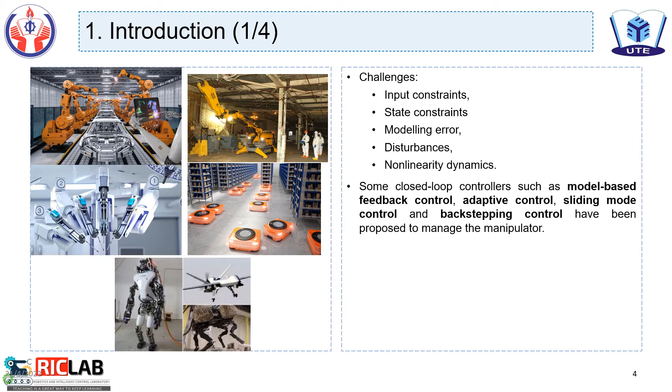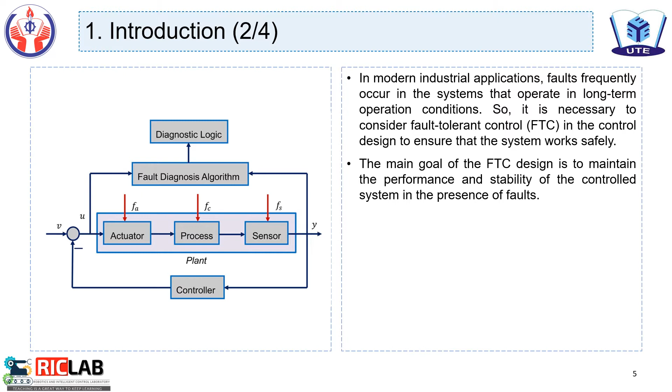In modern industrial applications, faults frequently occur in systems that operate under long-term operation conditions. So it's necessary to consider fault-tolerant control in the control design to ensure the system works safely. The main goal of fault-tolerant control design is to maintain the performance and stability of the control system in the presence of faults.

Fault-tolerant controls can be classified into passive and active fault-tolerant control. For passive fault-tolerant control, the approach is developed based on the robustness of the conventional control without any feedback of the normal and fault operation. In contrast, active fault-tolerant control depends on the online results of a fault diagnosis observer to make decisions for reconfiguring the control structure.

Although the active fault-tolerant control possesses a complex structure, it can manage the high magnitude fault well.

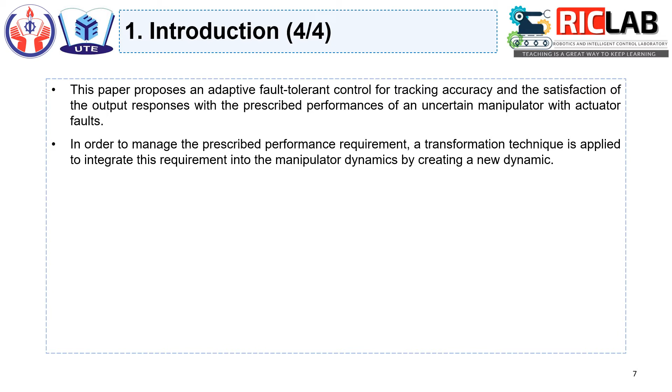This paper proposes an adaptive fault-tolerant control for tracking accuracy and satisfaction of the output response with prescribed performance of an uncertain manipulator with actuator fault. In order to manage the prescribed performance requirement, a transformation technique is applied to integrate this requirement into the manipulator dynamics by creating a new dynamic.

Then the proposed control is designed based on the new model with backstepping techniques, a state observer, and a fuzzy logic system. The state observer has to approximate the unknown uncertainty, including the external disturbance and actuator fault. In practice, the approximation error of the state observer in the transient state is significant.

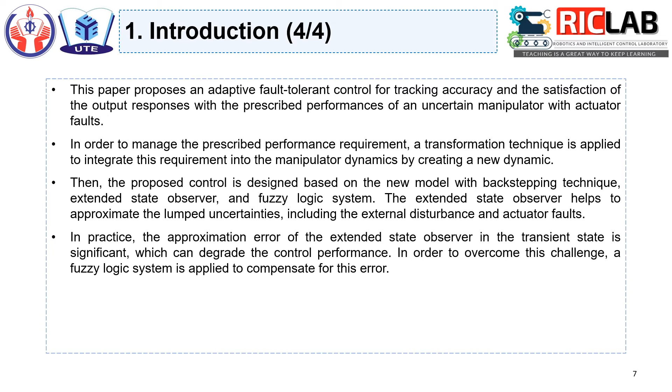It can destroy the control performance. In order to overcome this challenge, the fuzzy logic system is applied to compensate the error. Finally, simulations of a two-DOF manipulator are implemented in MATLAB Simulink to prove the effectiveness of the proposed control.

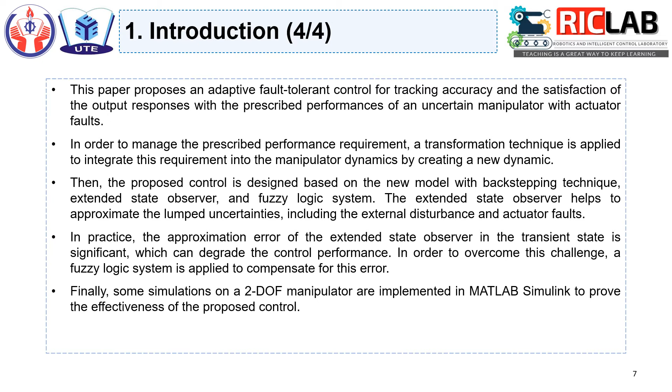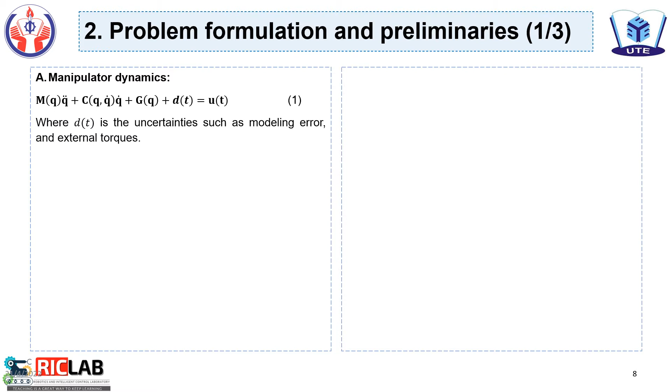Now we move to section 2. In section 2, we present the manipulator dynamic by equation 1, where dt is the uncertainty including the modeling error and external disturbance. The actuator fault is presented by equation 2, including bias error and loss of effectiveness.

In order to integrate the actuator fault in the control design, the manipulator dynamic in equation 1 is represented by equation 3. So we have delta dt including the uncertainties and the bias error and loss of effectiveness errors in the actuator fault.

We have three assumptions for our manipulator. Assumption 1: the manipulator is constructed such that for any actuator failed at the locked-in phase, the remaining active proportion of the others is available, so the manipulator is still controllable.

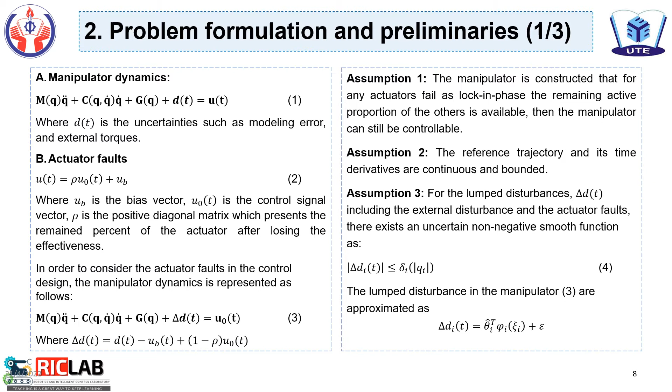About the state observer, the state observer is used to estimate the unknown uncertainty, and an extra state is provided to exhibit the unknown uncertainty. In order to design this observer, we have to present the manipulator dynamic in the state-space model as presented in equation 6. We have assumption 4 for our manipulator.

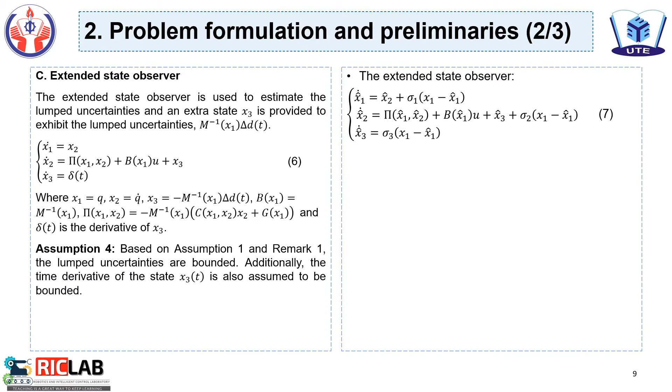The first part is based on assumption 1 and remark 1: the lumped uncertainties are bounded. Additionally, the time derivative of the state is also assumed to be bounded. So the state observer is presented by equation 7.

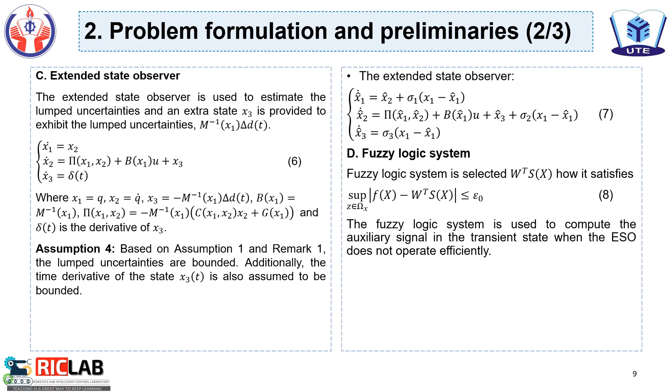The prescribed performance approach can be explained as follows: the control applied to the manipulator guarantees that the output response tracks the reference and stays within the upper boundary and lower boundary. The prescribed performance is described by conditions 10 and 11.

So we define the new error variable to integrate the prescribed performance into our dynamic, and the unconstrained dynamic of the manipulator is presented by equation 14.

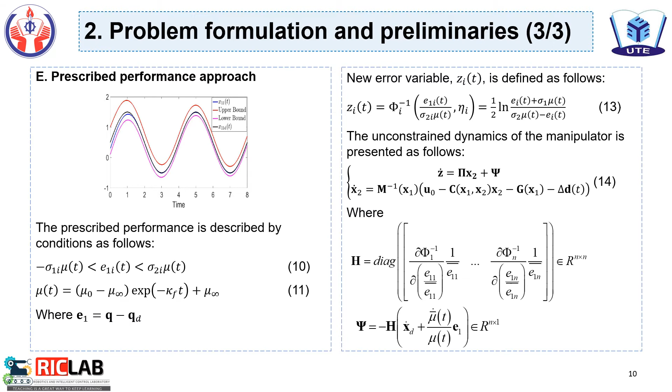Now we move to section 3, proposed controller. The proposed controller is developed based on backstepping control, extended state observer, fuzzy logic system, and adaptive law.

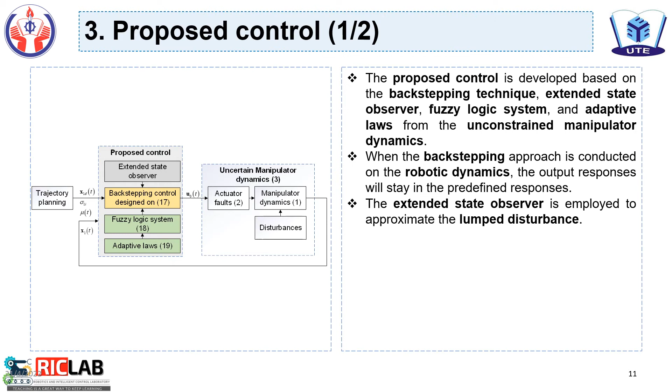For the unconstrained manipulator dynamic, when the backstepping approach is conducted on the robotic dynamics, the output response will stay in the predefined response.

The extended state observer is employed to approximate the disturbance, including the uncertainty and actuator fault. The adaptive fuzzy logic system compensates the approximation error of the extended state observer in the transition state. The effectiveness of the extended state observer and adaptive fuzzy logic system ensures the reliability and quality of the control system.

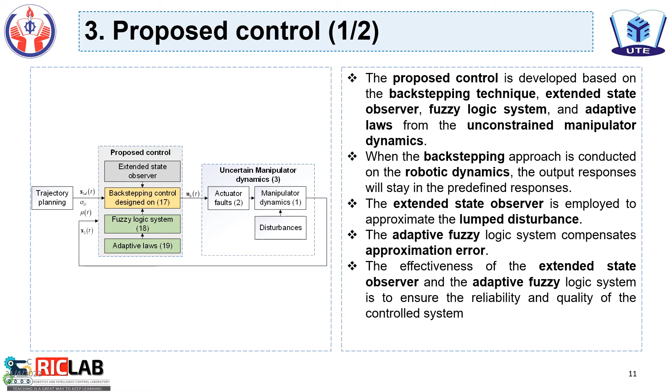The proposed controller is conducted as follows. First, we define the tracking error as equation 17, and next we select the virtual control as equation 18, and the controller is selected by equation 19. In the controller we can see the result of the extended state observer, and the result of the fuzzy logic system is presented by equation 20.

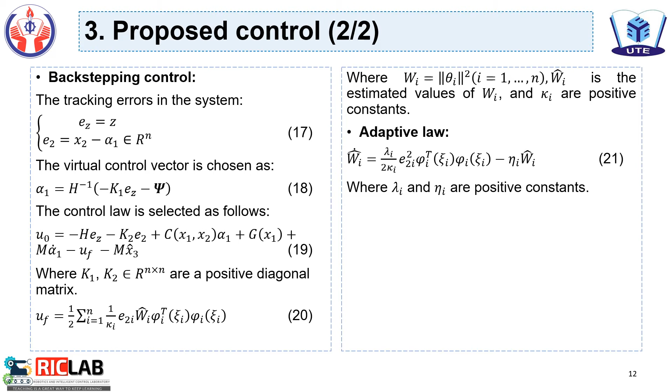In order to verify the effectiveness of the proposed controller, some simulations are implemented on the 2DOF manipulator with the existence of external disturbance and actuator fault in 30 seconds. The simulation environment is in Matlab Simulink 2021A with a sample time of 1 millisecond.

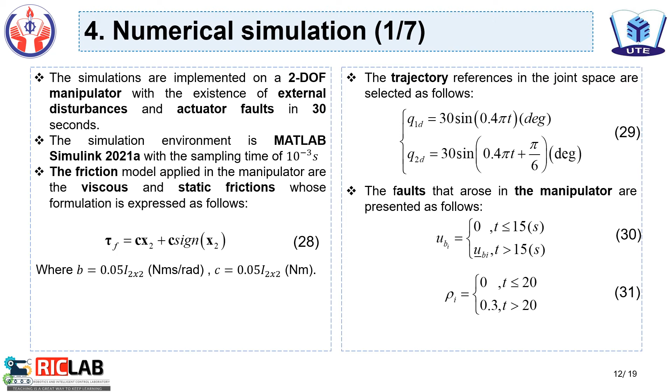The friction model applied in the manipulator includes viscous and static friction, expressed by equation 28, and the trajectory is referenced in the joint space. The desired signal is presented by equation 29, and the fault in the manipulator is the bias fault and loss of effectiveness, presented by equations 30 and 31.

About the fuzzy logic system, we use Gaussian functions for the membership function, presented by equation 22, and we have equation 23. The fuzzy set is selected with intervals from -5 to 5, and the initial condition of joint 1 and joint 2 is pi/6 and pi/6 radian.

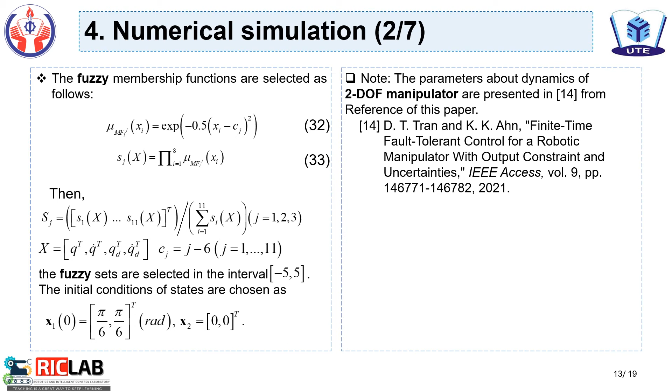Figure 3 presents the error response of the three controllers for joint 1 and joint 2. In the three controllers, the black line represents the prescribed performance backstepping controller, the blue line represents the prescribed performance backstepping extended observer controller, and the red line represents the proposed controller.

All three controllers consider prescribed performance requirements, so the output response of the three controllers stays within the upper and lower boundaries.

In the second controller and the proposed controller, because we use the extended state observer, when the fault arises at the 5th second and 20th second, the accuracy of the system is still guaranteed. But in the first controller, we do not use the extended state observer, so the control performance is degraded.

Next, we compare the second controller with the proposed controller. In the second controller, the approximation result in the extended state observer causes uncertainty in the transition state, from 0 to 1 second.

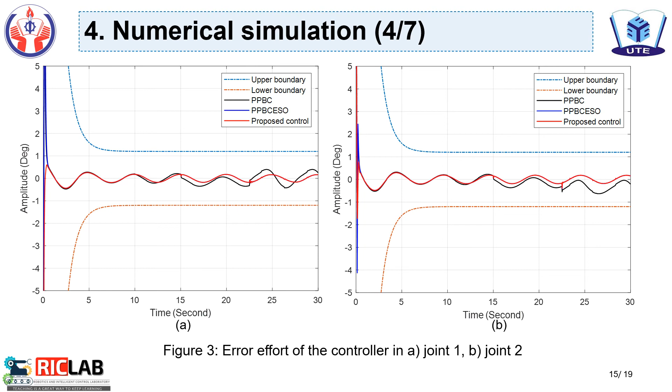Figure 4 is the comparison between the disturbance and the estimated result from the extended state observer for each joint of the manipulator. In the steady state, the estimated result tracks the disturbance well for joint 1 and joint 2, but in the transition state, it is not good.

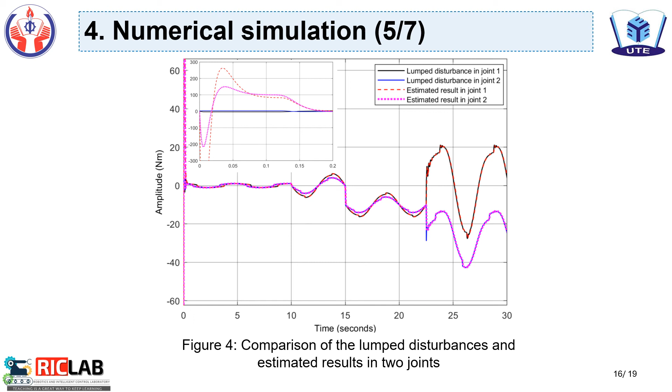Figure 5 shows the fuzzy logic system output for each joint. In the transition stage, the output of the fuzzy logic system increases significantly to compensate for the approximation error from the extended state observer. After that, it decreases and varies quickly.

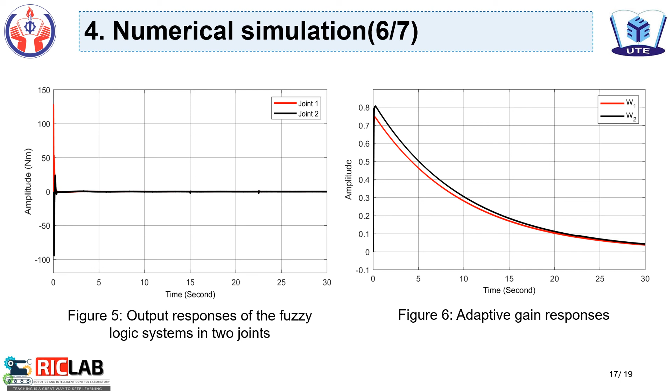Based on the above, we have a summary conclusion about our research. Firstly, this paper proposed adaptive fault-tolerant control for a manipulator against actuator failure and external disturbance. The manipulator dynamic was presented, where the external disturbance and actuator fault comprise the lumped disturbance.

The transformation technique is employed to integrate the predefined performances into the manipulator dynamic. The proposed controller is developed based on the backstepping technique, extended state observer, fuzzy logic system, and adaptive law. The backstepping approach within the proposed controller ensures the stability of the new dynamic.

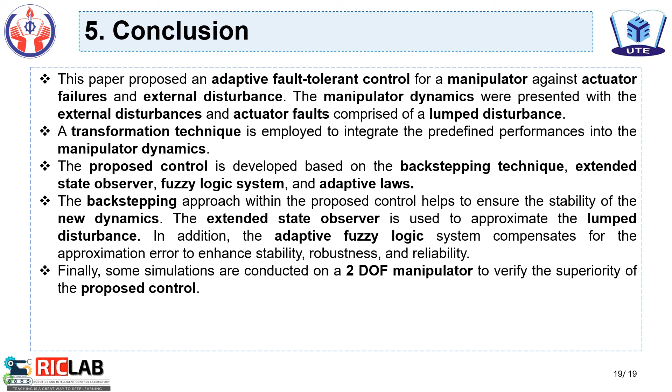The extended state observer is used to approximate the disturbance. In addition, the adaptive fuzzy logic system compensates for the estimation error to enhance stability, robustness, and reliability. Finally, some simulations are conducted on a 2DOF manipulator to verify the superiority of the proposed controller.